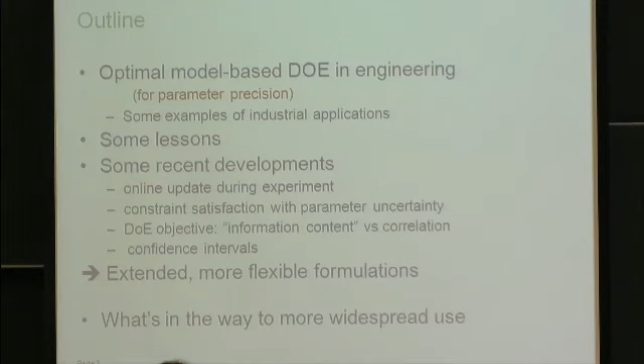I'm personally quite excited about the possibilities I've discovered quite late in terms of extending the range of traditional formulation. And I will stop in the end nonetheless to highlight some of the reasons I believe this technology is not in more widespread use as it should be.

My own background, I'm a chemical engineer. I've been involved for many years in what is called process systems engineering. Is there a pointer?

And what that means is that the whole business, from designing new products and processes and production systems, is now very much centered on the use of mathematical models at all stages. And if you can describe what's going on, then you can analyze, you can optimize all the way from the initial inception down to the supply chain and distribution and impact on the worldwide scale. So that's what we do, provide this mathematical support to these processes.

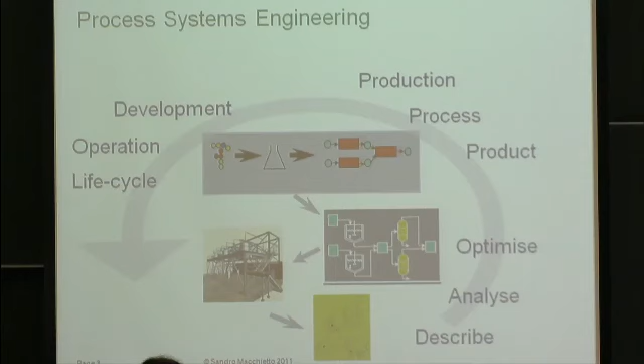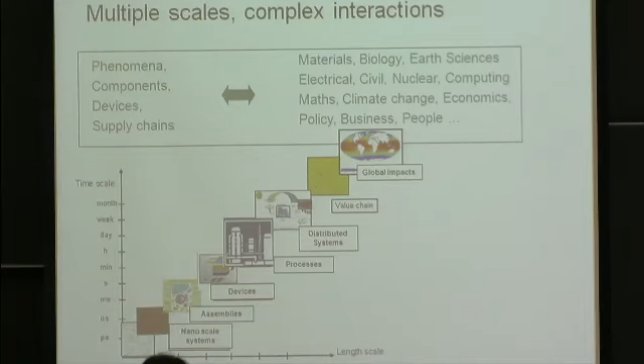And in fact it's a very complex business because it involves dealing with processes at all kinds of scales, from the conversion in the vessels, reaction and heat transfer and so on, all the way up to global impacts on value chains, but also picking up the behavior of materials within catalysts, within small assemblies, all the way up. So it's actually quite complicated, and by nature this process involves dialoguing with all kinds of people who are domain experts in various areas. So as a profession we are gregarious by design, otherwise we wouldn't be able to do our business. But I'm also a firm believer that we need all kinds of inputs in order to address these problems.

And these days this process is helped by a very large number of support tools which are very, very powerful. Nobody would design a refinery without the support of simulation tools. And more recently, I think the emphasis has been on languages which allow the modeling of the physics in a very easy way. So if you can describe the physics, if you can describe the basic equations that regulate that, and if you can write the equations, then you should be able to use the modeling language to do that, and not have to worry anymore about translating that into a C program with all the solutions, technologies, and in fact you can write models now quite easily. Some of you may be familiar with MATLAB, but there are many other engineering-oriented languages which do that.

I've been involved with one in particular called gPROMS, which addresses that in the chemical engineering environment. This typically also involves the use of a library of pre-canned models for traditional unit operations, whether it's separation, distillation, or reaction, and so on, and access to thermodynamics and physical property packages, which are also very important to describe the physics.

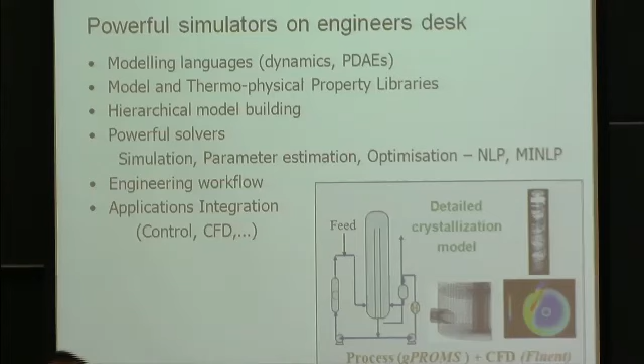Very efficiently. They also address the aspect related to the workflow, in terms of understanding how engineers work in their environment, in order to provide, for example, mundane but really very important things like management of and auditing for the evolution of models and tracking their application.

So that when you want to replicate something, you know exactly what you were using at that point. This is extremely important from an application point of view, although for the mathematicians involved it may not even be of importance. And also other application integration, for example, with control systems, with computational fluid dynamics, and so on.

There's some really interesting applications. We can describe, for example, a whole large-scale crystallization model using detailed population dynamics, in terms of how the crystal cells form, break, and dissipate.

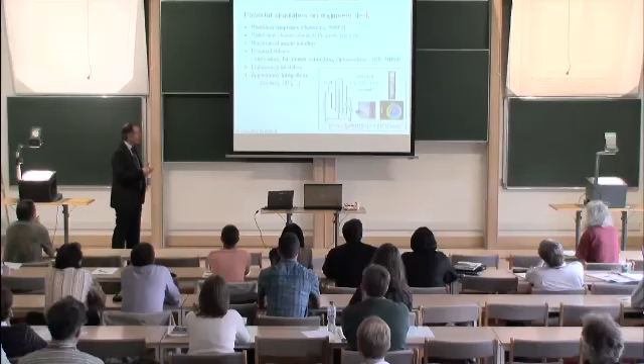You may have 3,000 or 4,000 model equations at a single point to describe this, and you can then couple this with the fluid dynamics to integrate the interaction with shear stress and other important factors. You can do this simultaneously, so you can also use these techniques to detect the effects of geometry, and hence look at scaling up and scaling down.

It's fairly recent activity, but it's very interesting, and this can be done on a fairly regular basis now. So, being everything so model-centric, one of the key questions is: where do these models come from, and how do I know whether they're any good, and how good do they need to be for the job on hand?

These are open-ended questions, but it's clear that's where statistical validation comes in. If you want to do all of these things, you better know that your models are good enough, okay? And enough is the operative word, because otherwise you end up with a Schrodinger's equation for everything, and that's clearly not possible.

In my personal view, the ability to write down the equation and generate the model is no longer the bottleneck. Anybody with a little understanding of the physics can do that. The question is whether those equations are right or wrong. So model validation is now a big bottleneck, and hence all the statistical paraphernalia which are necessary in order to do that.

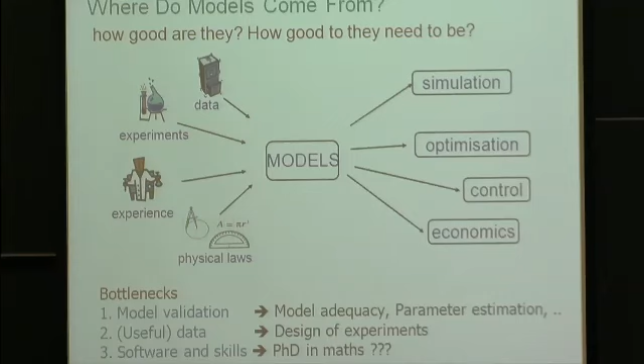So the design of experiments, that's where it comes in. The idea is generating useful data that go side by side with the process of building a model. The two things not being sequential or separate, but being part of the same thing.

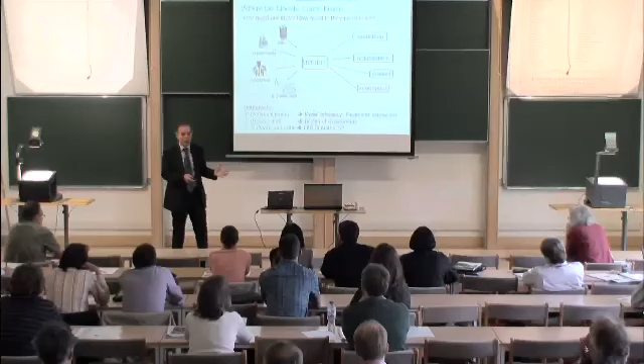And in fact, the bottleneck at this point is not just being able to do that, but being able to do it in an environment which supports your everyday work, rather than having to take time off, hire two PhDs to support you, and then come back two years later with the answer when you're no longer interested. So you do this within a work environment, which puts its own constraints.

I will mention this. Let me give you a couple of examples. These are examples that have been addressed recently -- very, very key within the field of addressing the energy needs.

Lots of work on fuel cells. At the center of the fuel cell process is the process of essentially oxidation that goes on between the fuel and the air in a membrane cell.

You have an anode and a cathode, and you have an electrolyte in between, and the transfer of ions on one end releases some electrons, which you can run around to light up your light bulbs. So that's the basic process.

Once you start looking at the physics, it's actually quite complicated. There are the reactions themselves at the surface of the anode and the cathode, electrochemical reaction and activation overpotential that dictate how they happen. There's the diffusion of fuel and ions in the system, so there's mass transfer. All of this is dictated by temperature and heat release, and it's all interactive. So it's very complicated to understand what's going on.

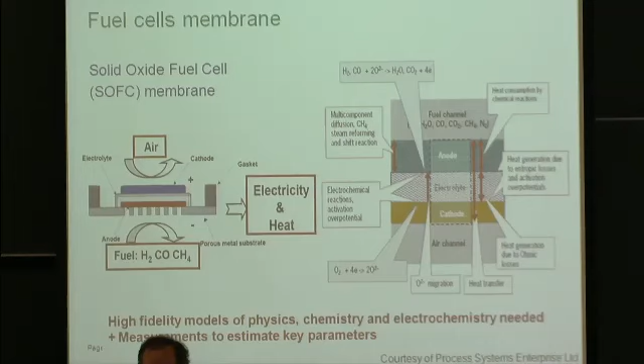On the other hand, if you cannot do that, then you cannot design, and the alternative is trial and error or experimental work, which is quite heavy. If you can get a model to do that, you can say what should be the target for my material design, my assembly, my configuration, and so on. Some things you can do with high fidelity models, but there are also things you cannot predict a priori, ab initio, so you end up having to do key measurements to calibrate your model.

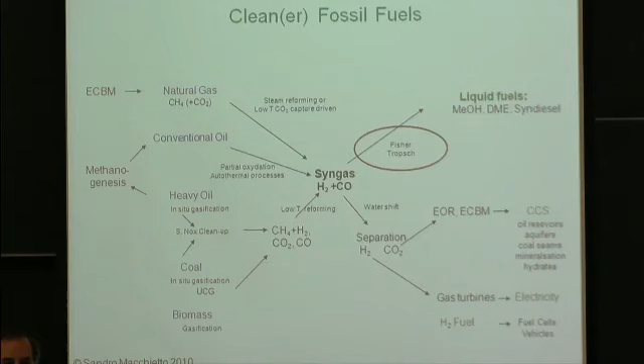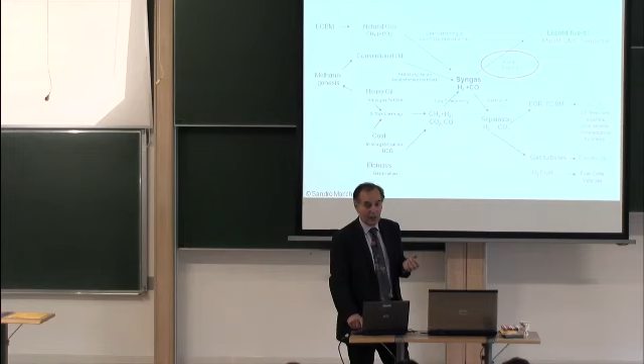Another example, and we'll come back to that, is again in energy applications. Everybody talks about the syngas economy. You can generate hydrogen from a variety of conventional and unconventional primary sources, including biomass through gasification and so on. Once you've broken down the molecules to their essential CO and H2, you can rebuild them in a variety of ways, including to make synthetic fuels. Fischer-Tropsch is one of the classic methods for doing that — very old, the Germans used to do this from coal before World War II, so it's not a new tradition.

One of the key issues is the catalyst that makes this happen from natural gas or methane and oxygen, producing the molecules you want and assembling them in the right configuration. But it also assembles molecules in other configurations, so you get product distributions that are very spread out. You get a lot of unwanted stuff along with what you want, which means the yield of your product is low and you have huge separation problems.

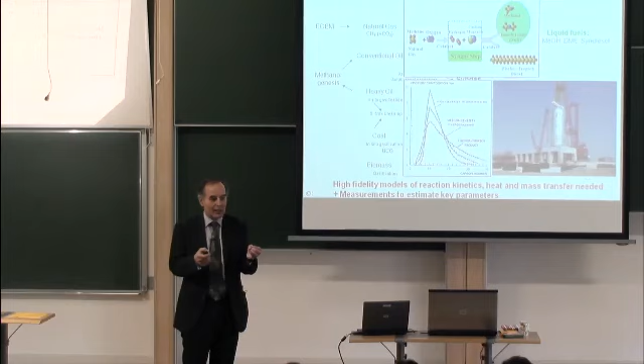The economics is really dictated by what happens at these catalyst sites, and these are very big reactors. So you can write models for the mass and energy transfer, but at some point you need to identify key parameters characterizing both the reaction and the heat transfer and how they work. The problem is not easy. I'll come back to this and show how design of experiments has been used in this area.

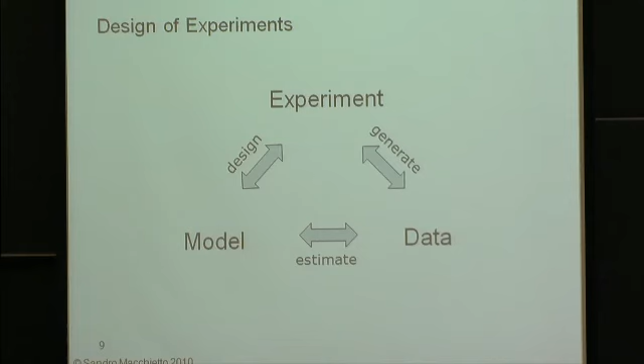Since you are here, you all know what this is about. The idea is to generate this virtuous circle between using your understanding from a model built from initial data — using the structure of that model, the rich information within it — to decide how to plan your next experiment so that it generates data which are useful rather than not. That's the basic idea, and there are lots of variations on this, and we'll see how some of these are applied.

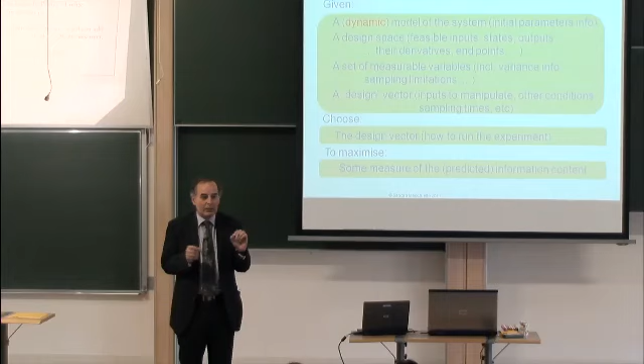In a standard situation, you'll want a model — I've used partial differential and algebraic equations, PDAEs, which can be discretized into a differential algebraic equation model as the general set. It's dynamic in general, because if you perturb something and elicit responses in a dynamic sense, you get a lot more information. That's one reason for having dynamic models, but also because the processes you want to describe are intrinsically dynamic — reactors aren't at a particular steady state, you want to start and stop them, so you need models that describe those situations.

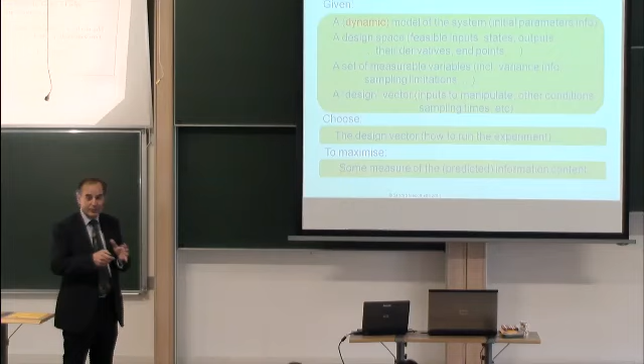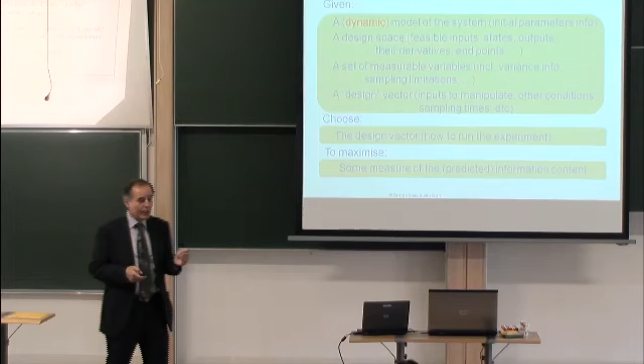You have a design space within which you can decide how to move, which may include both the temperature and pressure within which you can run your experiment, but also the derivatives — how fast something can react, or how frequently you can measure certain quantities, and where you want to end up in your experiment.

You don't want to end up with a very high temperature, because you need to be able to shut down and leave things at a steady state.

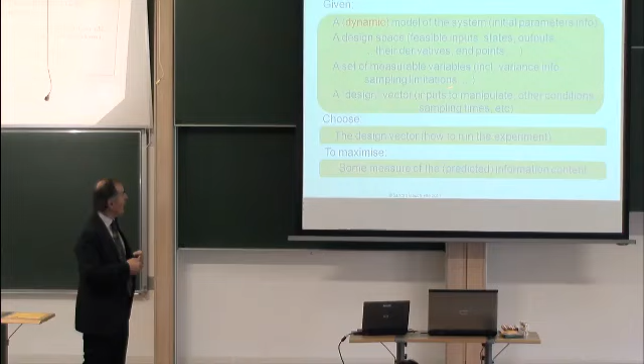You need to identify what are the variables you can use, measure, and the quality of those variables. You may have some choices there, variance information about the data you can get, and sampling limitations, which I already mentioned. Within this, you also need to design what you can manipulate, which is within your domain as a designer to change.

Out of this, you need to have something that helps you decide what is the best experiment. And best means something related to what you want to get out of this information. So the qualification of best is actually quite important.

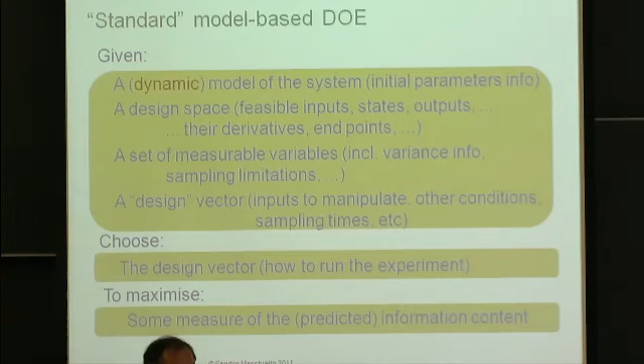Typically, the objective function being used is some measure of the predicted content or value of the experiment. If you're trying to estimate your parameters within certain precision, then it's related to the variance covariance or the ellipsoid of the confidence intervals. But that's quite key, because if you're trying to optimize something, you need a scalar.

In putting together this talk, I went back to some of the early stuff. It was one of my very first PhD students, many moons ago, who helped me formulate this as a dynamic problem, an optimal control formulation. Apparently, it hadn't been done before with DAE systems.

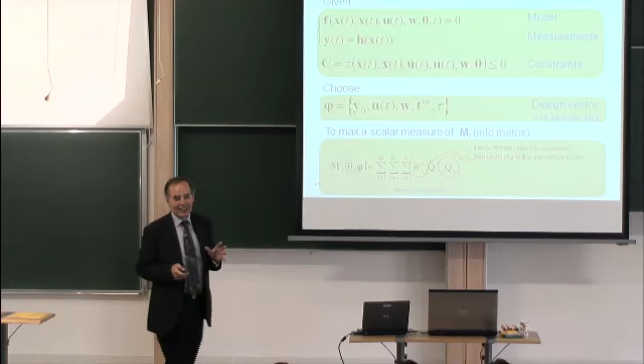This is more or less the formulation we had at that time, 89, mid-80s. Great problems at that time. The formulation was done, conceptually the problem was solved, but nothing worked. We had incredible difficulty getting the equations to solve, and the optimization techniques weren't up there. The integration techniques got stuck and took forever, and we had to scale back and back and back until we could solve anything of any use.

But conceptually we were there, and the formulation included a sample time for when to do your samples over time. So there is clearly a time dimension here, but within this there could also be a space dimension. In particular, if you had discretization of a partial differential equation using any discretization technique, you end up with a large set of differential algebraic equations.

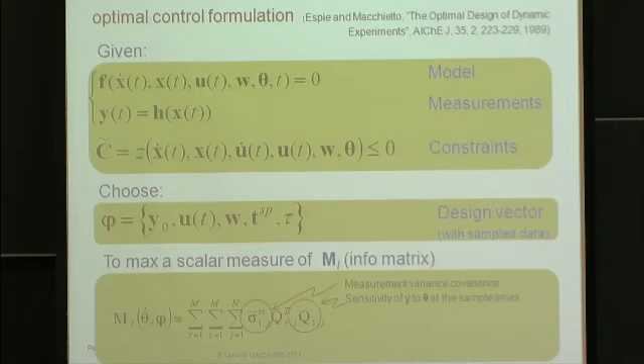The other interesting thing was that for a sampled system in particular, this scalar matrix we looked at, we use this information matrix, which is just the inverse of the variance covariance matrix. You can call it the Fisher matrix. Many names have been given to it over time.

Essentially, it has two components. One takes care of the dynamic sensitivity of the responses, the things you can measure, to the parameters, the things you want to identify, at the sampling times. The other takes care of the quality of the measurements.

You can add them up in a variety of ways to try to transform this into a single scalar. I think the scalar is a very powerful number because it has to tell you a lot of things about all the parameters and so on.

It's usually related to the 95% confidence ellipsoid of the predicted experiment. The usual way is that a small ellipsoid means high confidence, meaning we know that the predicted experiment will give you very good data. This can also be translated to a single number by looking at the trace, or the volume, or the largest eigenvalue along this.

It's quite classical, and a lot of people have lots of variation in how to do that. But the basic underlying thing is that small ellipsoids are good.

You can then formulate this by sticking this scalar into an optimization algorithm and try to minimize this ellipsoid, taking into account some prior information from experiments you've done before and initial values of the parameters and so on.

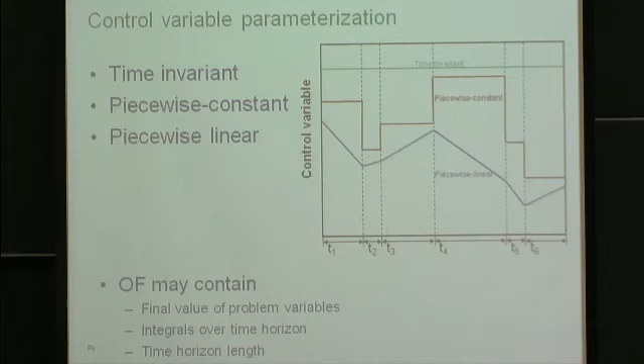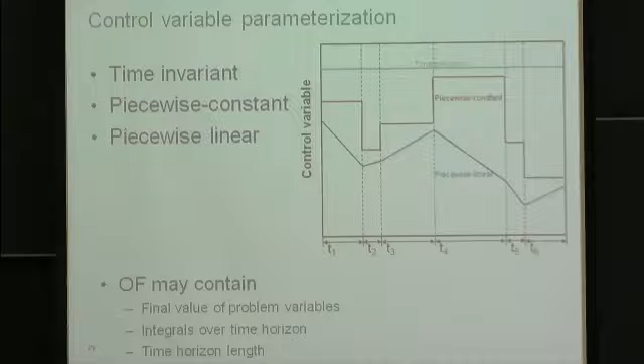You transform an infinite size program into a small number of optimization variables, and it's proven to be very useful. Typically then you can have a nested program doing the integration of your equations and manipulate the control variables on the outside in order to optimize your objective function using possibly successive quadratic programming.

Has been very successful in this area with a highly nonlinear function. The trick here is to reduce even a very large number of states into a small number of decision variables, and for this type of problem this seems to be working very well.

The objective function may contain all kinds of varieties of information which are of interest to the engineers. The final values and variables, whatever your experiments, you need to leave it at a decent temperature or within a safe range.

Concentrations and so on, and you can have integrals very easily - the total amount of energy you spent or the total amount of molecules you use during an experiment, because you can convert this into the equivalent differential form, and the experiment length itself can be a variable.

There is also quite a nice way of handling constraints. Constraints within this environment are quite important. There's a difference between this approach and a purely statistical black box approach, which has great difficulty in handling constraints. You have a model, so you can predict where your states will go.

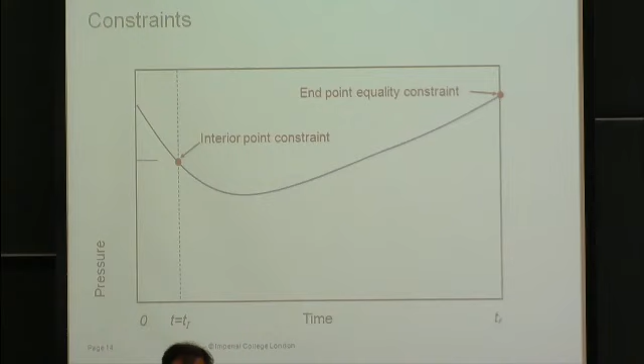And you can use that to say, well, are my constraints going to be violated or not? You can have different types of constraints - at the end, as I already mentioned, or at given times within the interval, or in fact at all times. Whatever you do, don't have your temperature exceed a certain maximum value, or never use more than 20% of your composition of X, because you go into the explosive range, or a number of other interesting things.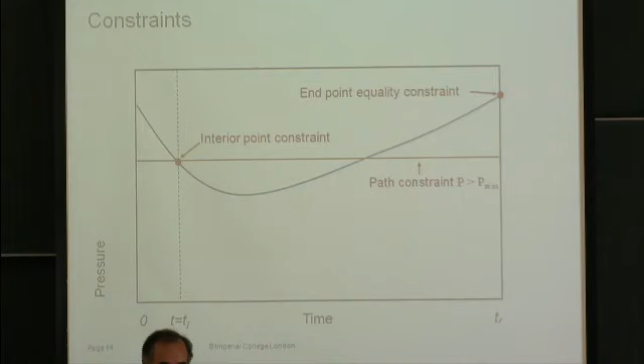These interior path constraints are not easy to handle on their own, but the kind of classical way is to calculate the integral of the violation and then put the integral of the violation as one of the constraints.

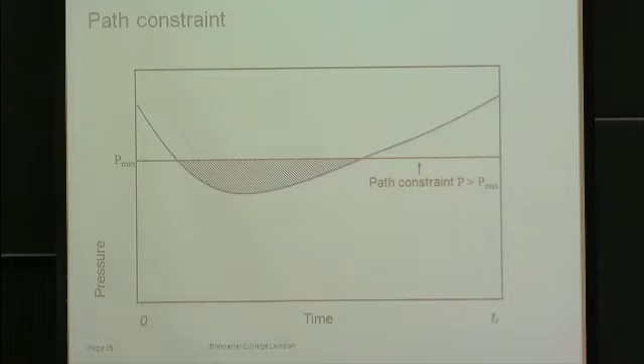All of this has actually been packaged and is available in - not in many, but in some standard simulators. So what I talk about here is a degree of practical maturity. What does that mean, a degree of practical maturity? It means that somebody out there is starting to use it.

Okay, let's not get carried away - this is not a technique that's now commonplace, but some engineers are starting to make use of it. And one of the reasons for that, I think, comes from the modeling side. It's become a lot easier to formulate the problems.

So you don't have to spend all your time writing your differential equations and then translate it into programs to interface with various optimization libraries or simulation libraries and so on. That drudgery is by and large taken away from you, so people can concentrate on the use of the problem rather than problem formulation. And once you do that, then you can resort to the same powerful integration and optimization algorithms which have been done for simulation and optimization - that's a great advantage.

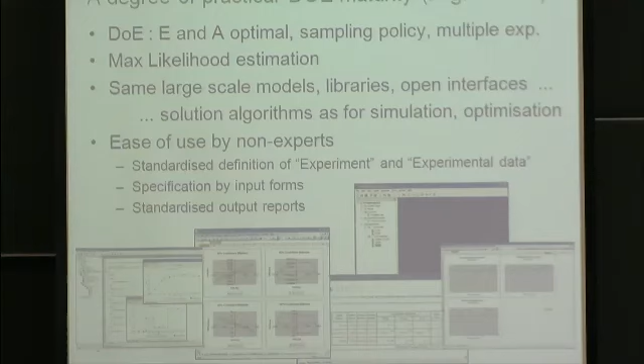And the same in terms of the output reports. Engineers don't like statistics, okay? It's an acquired taste. In many cases, if you make life simple in terms of interpretation, then they may actually understand what it is, but otherwise they will not want to go anywhere near it.

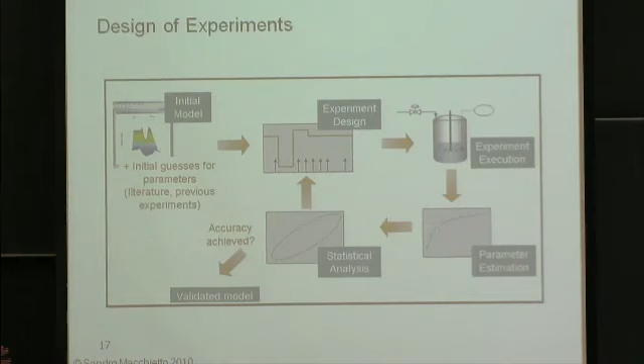That's a given. So even having standardized output reports with interpretation that help translate this fairly simple, sometimes statistical analysis into something usable is actually quite helpful. Let me go back - so now we can actually close this loop within an engineering environment, and let me give you a couple of applications of this, coming back to the ones which I've illustrated.

In terms of generating the models here, this can be done now using a fuel cell library where you have primitives for the electrolytes, primitives for the anodes and cathodes, and you can do that by selecting model and specifying the models rather than starting from scratch. You can also resort to the thermodynamics for a lot of the thermodynamic for electrochemistry and heat phenomena. What is not possible there is usually to identify some of the key parameters.

I'll give you an example. This is a fairly standard so-called flow-through experiment we use in the industry to characterize the behavior of a single membrane. And this has a number of features. You feed air on one side and the fuel on the other side. There's electrolyte and the anode and cathode. You measure the different voltage. You measure the amperes, given from a certain resistance.

At certain conditions, with a high feed-to-air flow rate, you have a good amount of reaction going on. The conditions are fairly uniform, but it becomes quite difficult to measure the changes in composition. On the other hand, you could use a low feed-to-air ratio, and it becomes a lot easier to measure precisely the changes in composition. But then you have maldistribution. It's very difficult to ensure that what happens at one end and at the other end of the membrane is the same. So there are intrinsically difficult problems, which means you have a formidable problem in data interpretation, even if you have lots of data.

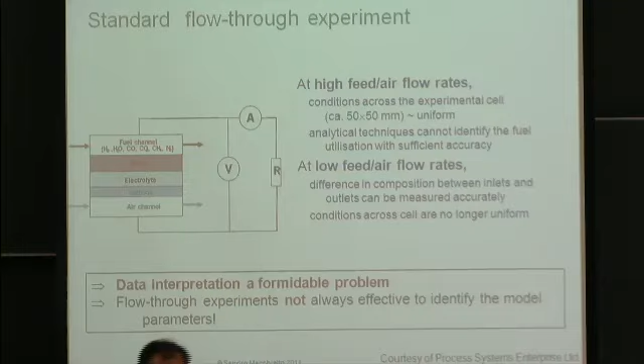What happened here is, using the model of this system, we looked at what is the best alternative experiment that could be run, designing the apparatus itself, and it turned out that rather than a flow through, a recirculated flow here will actually be far better, because the changes in composition will be larger, and you can measure them accurately, even with a high fuel-to-air ratio. And because most of the oxygen here will be depleted, you have little reaction even at the high fuel ratio. So this type of apparatus was designed using a fairly high fidelity model of the reactor itself, and it gives a lot of very, very good data, especially when coupled with the data collected from the other experiments.

So the two work hand in hand, and you are able in this way to characterize some of the reaction kinetics. The interesting thing, once you do this for a single cell, is the lowest level component within a fuel cell. A fuel cell will have an additional number of stacks, one on top of the other, to increase the amount of electricity produced. The air flows in between, and the fuel in between in a sandwich form, and they go across, so it becomes more complicated. But in fact, this can also be modeled.

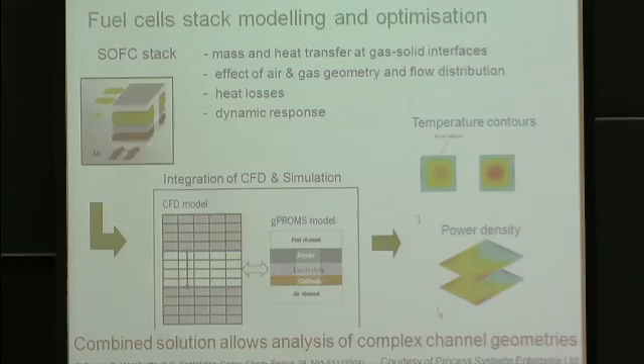The flow dynamics can be modeled. You have lots of diffusion in two directions. For this situation, this can be the basic model for the electrochemistry we just described, coupled with a CFD model to describe essentially the flow dynamics and flow diffusion there. And it turns out that you can do some experiments without the reaction, just to identify how the flow goes. So you eliminate a big problem by looking at essentially two problems separately: the reaction itself and the flow itself, and then you put them together, and you find that you are able to predict two very important quantities.

That is the power density, which is how much electricity is really generated, and its distribution, and the temperature contours, which reflect that. You would like both of them to be very uniform, ideally. And then you can go back and decide about what is the optimal flow distribution and stack arrangement, and ways of controlling that. So that you can do for the stack. There was no design of experiments here for the ensemble, but for the individual components.

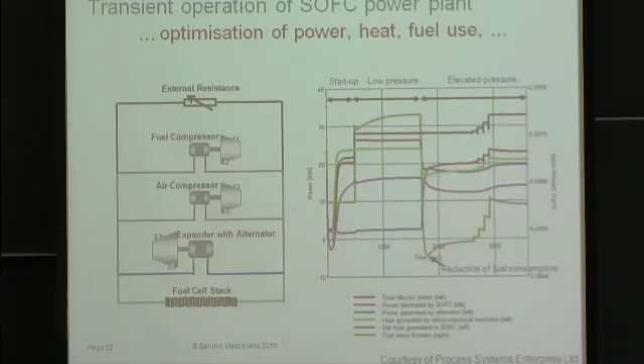And in fact, quite a lot of the fuel cell providers, Toyota and others, are using now this modeling technology together with the experiment design within that to design their own version of mobile fuel cells or for static applications as well.

Let me come back to the other example, which I already mentioned, this Fischer-Tropsch reaction.

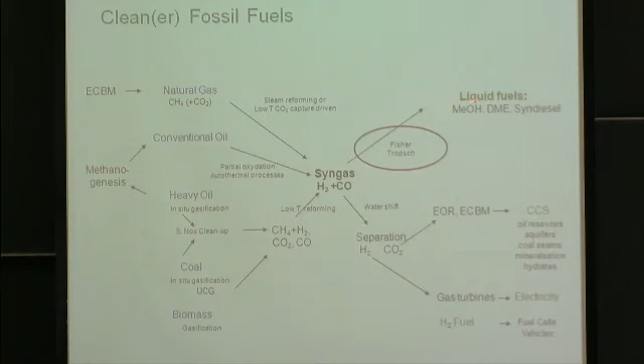Here we are concerned about remembering the whole scheme of things, going from either natural gas or biomass and so on to the smallest molecules, the syngas molecules, and then from there to liquid fuels, syndiesel, methanol, DME and so on.

I already mentioned that the product distribution is really the key to achieve this. Why is that a problem? Because if you wanted to do that in a very small device with no time and space distribution, you may be able to control it rather better.

But if you're trying to do this in one of these humongous beasts, 22 meters, 1,200 tons, this is a shell and tube reactor. There's lots of tubes with catalyst inside, and because it generates a lot of heat, there's heat removal on the outside. Controlling the temperature within this reactor is actually quite tricky. All tubes experience different environments, so each tube has a different profile, and you end up with quite a large controllable problem.

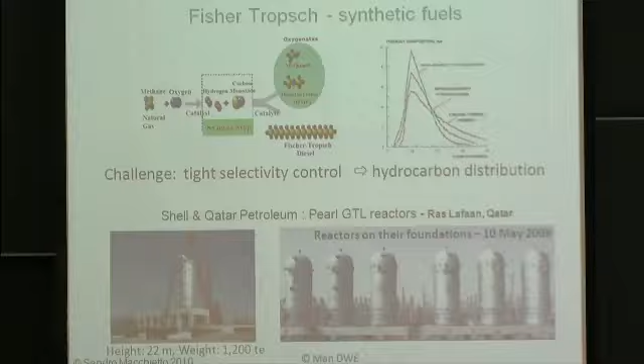Just to give you an idea, this is the Pearl development that Shell and Qatar are building in Qatar. The latest budget was $18 billion, several billion dollars over budget, still lots of uncertainty in terms of how to do that. The reason they are this way is because Shell essentially scaled up a prior reactor they had in Malaysia, just because that worked, and they didn't really want to make many changes just in case.

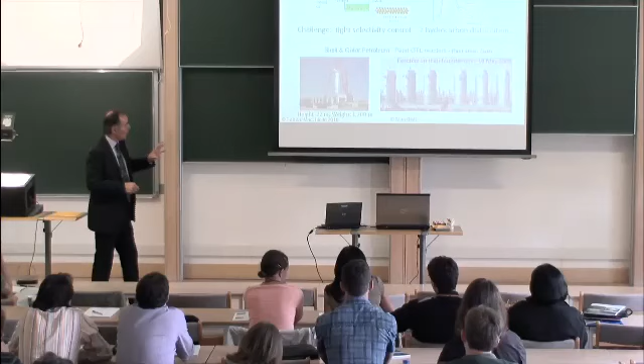You can think about the investment here. So one of the questions is how can we understand this a lot better?

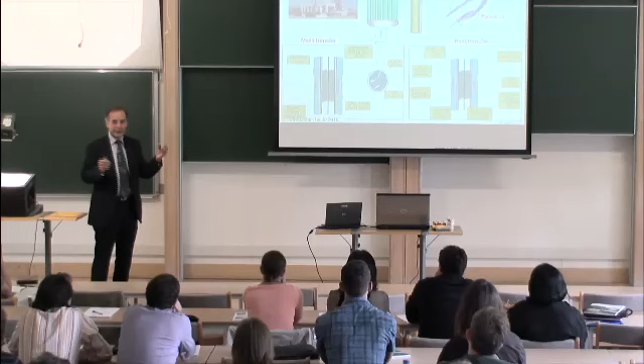The trick would then be to have all the tubes being the same with a fair degree of constancy there. How can you do that? Well, first you need to understand the mass transfer, which dictates how the reactants go inside the pores and come out. Then you need to understand the interaction between the cooling and the reactions going on, so all the heat transfer problems associated with that.

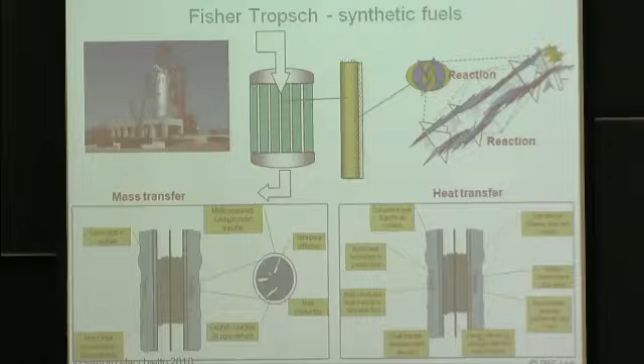The approach taken here was to really, rather than try to identify something as complicated as that, which it is, and you may have 30 or 40 reactions going on, to try to say, well, can we divide and conquer? Let's have a place where reactions go on their own, so a microreactor where you don't have heat transfer, and another place which is a typical tube, and you just measure the heat transfer properties in the absence of reaction.

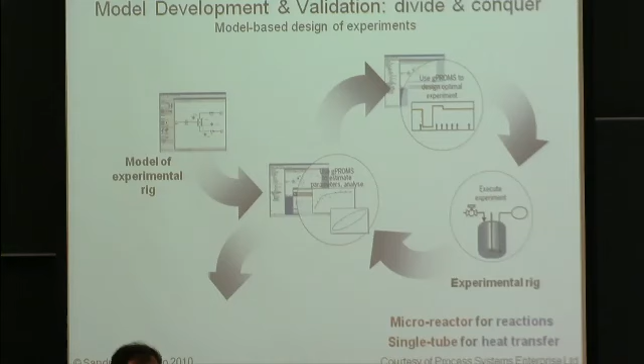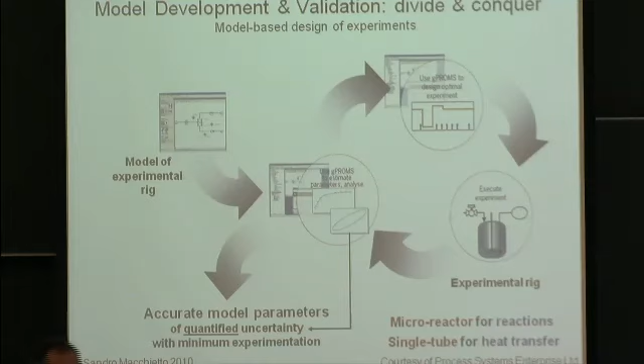You can devise, and in fact, rigs were built up in the same way using this model-based design of the equipment and experiments, and then you can do a certain number of experiments identifying independently the reaction and heat transfer components until you have some models of these Lego blocks. Then you put them together within the engineering configuration, taking into account flows and how these interact, and again, lo and behold, you can find something which is much more predictive because you got the physics essentially right.

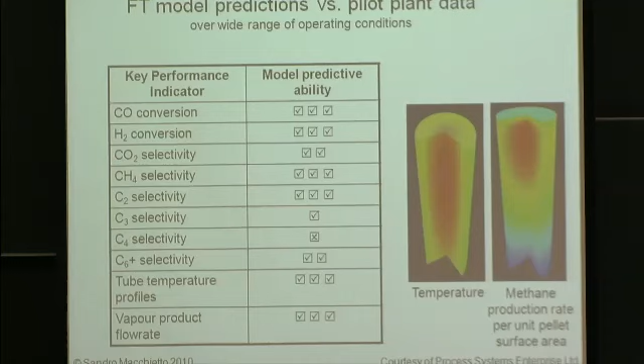Here are some slides showing that the important quantities you really want to get right are mostly obtained quite well. In particular the methane and CO conversion are obtained quite well, and these are temperature and composition maps along just one pipe, showing that they are nowhere near being uniform, but they're a lot more uniform than they would otherwise be.

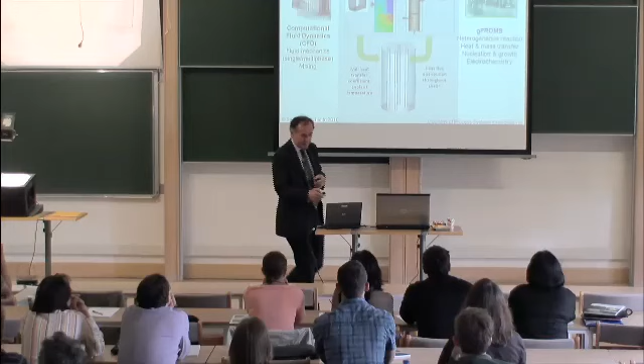So once you have confidence in the model prediction, then you can do design and optimization studies. And in fact, this can be done by putting together this simulation model with the fluid dynamics that tells how the cooling fluid will be circulating on the outside.

You cannot do this for the 10,000 tubes that are in a reactor, but it takes samples from some tube at the center, one near the edge, and so on. You can look at various design ideas for getting the tubes all the same, including loading each tube with different catalyst activity at different positions, and manipulating the geometry so you can affect the heat transfer properties to get the same composition.

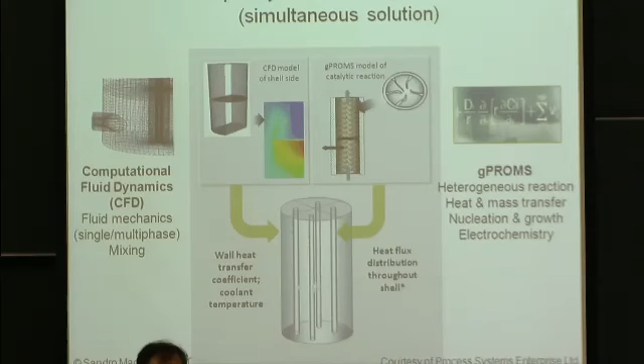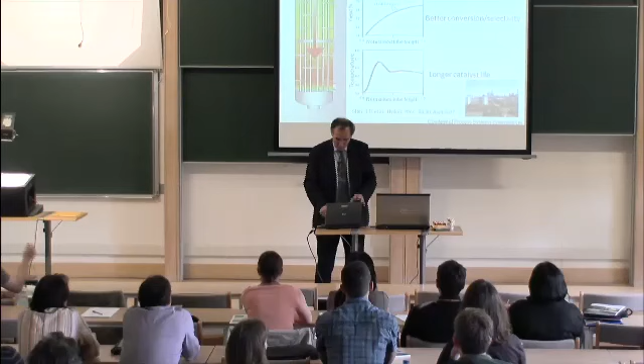The temperature profiles here, again, are all the same for the various tubes, which means you can much more easily predict the yield and optimize it, and also adjust the catalyst life and make life much easier. In fact, this is a plant that's being built in Korea as we speak. So this technology is really built on accurate values for your high fidelity models, which were obtained using the design of experiments.

In spite of the success of these techniques, there are some common findings. Even if you're able to do sophisticated stuff with complex models, typically you get, in a lot of situations, confidence ellipsoids which are very highly stretched, no matter how you try. Some may be good, but they may include lots of negative things, which physically doesn't make any sense.

So correlation is actually built in, and then people start to ask, is it the model? Is it the analysis? What do I improve? Is it the data? Actually, this is very good progress, because by the time people start asking these questions, it means they understand statistics, whether they know it or not. Do I have the right apparatus to get the data, so that my design space is not big enough, or so on?

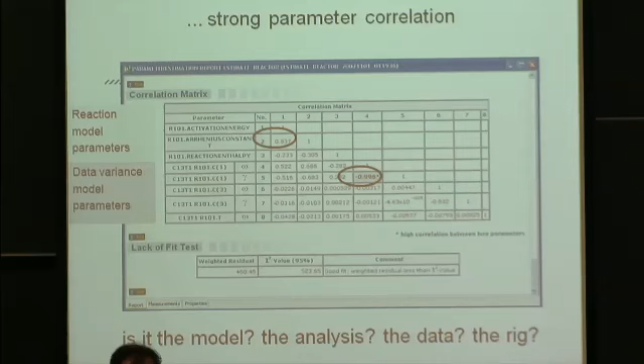But that's the way of life, lots of cases you cannot get away with that. I think there is a very elementary explanation for that. Many of these phenomena are fairly complex, and very often, just looking at the sensitivity profile, some parameters show good sensitivity in one state and then go to zero or very low, while other parameters have high sensitivity later on. This is common. In physical terms, this means there is a change of mechanism along the way, and some mechanisms are more dominant in one area, and other mechanisms are more dominant in another area.

And if you try to have an experiment where you try to do both, some of the data will have singular parts in it, no matter where you are, and that makes it very difficult to estimate those parameters.

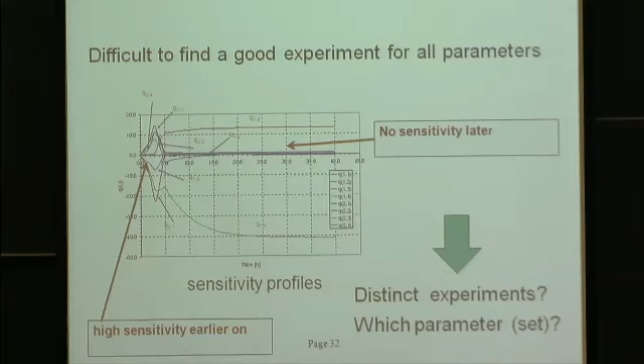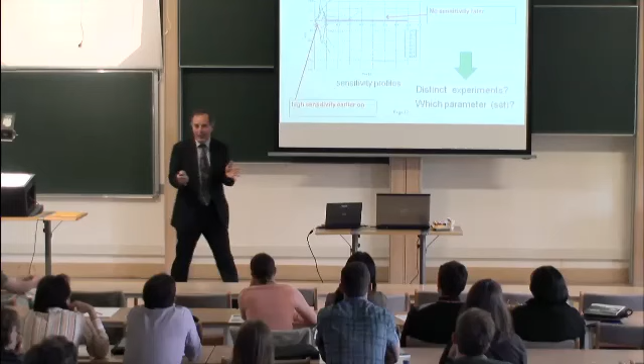In fact, the way that turned out, based on intuition, those earlier cases was to decouple: let's do some experiments for the kinetics, some experiments for the heat transfer, let's not try to be too ambitious. But very often you have 10, 15, 20 parameters, and you don't know how to decouple. And if you start looking at it as a purely mathematical problem, you find that trying to do everything together, you may not be able to do much more than so much.

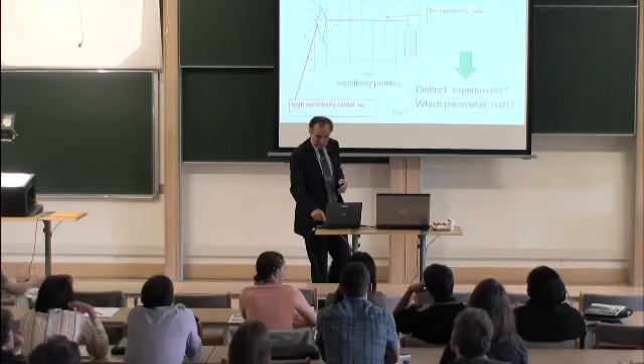So the question is, can I do this in a more automatic way? Can I identify the disjoint parameter sets and do different types of experiments? Here are some of the ideas we've been playing with. If you start to think in those terms, well, why should I do one experiment at a time? Why can't I do parallel experiments?

Rather than design one experiment, design two. Then you have the flexibility to design two experiments which are the same, giving you more repeatability essentially, or design two experiments which are orthogonal to each other, and you get two sets of values. I'm not going to talk very much about parallel experiments here for now, but there are some interesting ideas there. The other question is, how do I account for the error to start with?

You wouldn't need to do this in the first place unless you had error. So every model has error, especially at the beginning when you start with maybe some ideas of what the model might be. But what happens there? I'd like to touch a little bit on whether we're actually solving for the right thing.

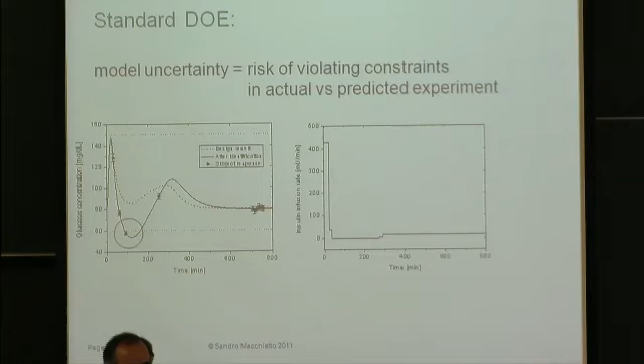Do I have the right objectives here? Let me give you a few hints. I'll go quickly, talking about uncertainty. The classic case is that I may have some bounds, and I design experiments, and my estimate of the optimal experiment would be like that. When I actually do it, due to the model mismatch, I may violate some of the bounds. So how do I deal with this? If this violation is not big, or not terribly life-threatening...

In some cases it is life-threatening. Here's a situation from some collaboration with my colleague at Padua, Fabrizio Bezzo, and Galvanin, who I think have a poster here on this, looking at a physiological model for diabetes. This is reasonably well understood, how the glucose cycle works. There are some compartmental models for that, but this is a very non-linear response over time.

So one of the ideas was, how do we deal with this? There are a number of standard tests to identify individual responses — these are what medics use to say, do you have diabetes, and how do you respond? The question is, can you use design of experiments to do better than that? I'll just give you some hints on this.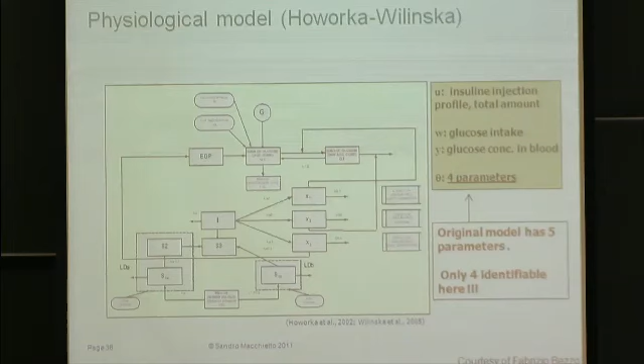There are a number of models around. You can take some of the state-of-the-art ones, and quite quickly find that some of them may have identifiability problems. They may have lots of parameters, but there's no way you can identify all of them. So even before you start, statistics is useful for this purpose.

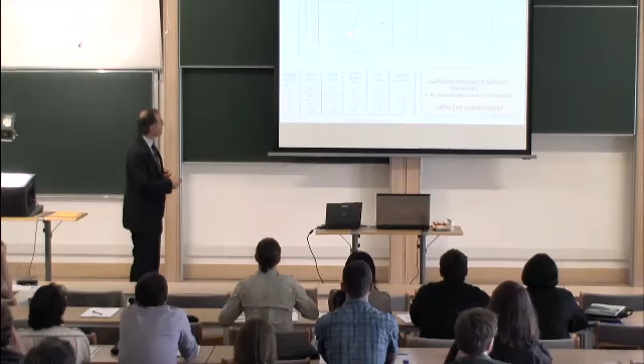And then if you ask what would be the optimal placement of samples for one of the standard tests, you can find it would be, over a time of several hours here. You want to put in some excitation, but not too much, just in case.

You can say, well, in this particular case, all the parameters will be estimated, but what is the effect of uncertainty? By definition, an optimum design will go to the extreme, very often to the extreme of your design space, because that's how you get more information. So it's built in that you will end up against the constraints.

One approach to look at the effect of uncertainty on the model or parameters on the constraints was to establish the variance of the responses. What is the probability that your responses are just the nominal one, and what's the cone of your responses? And if you want to meet these constraints with 95% probability, or 90% probability, how far back should you be? That's the basic idea.

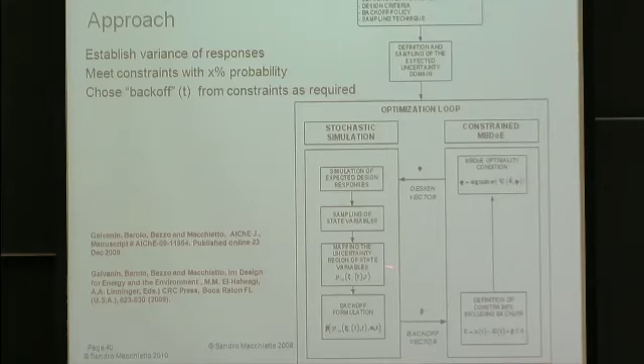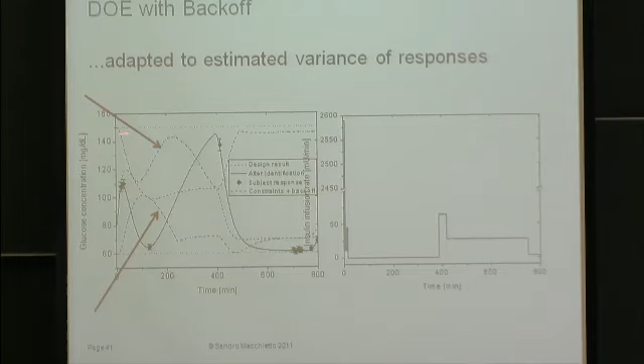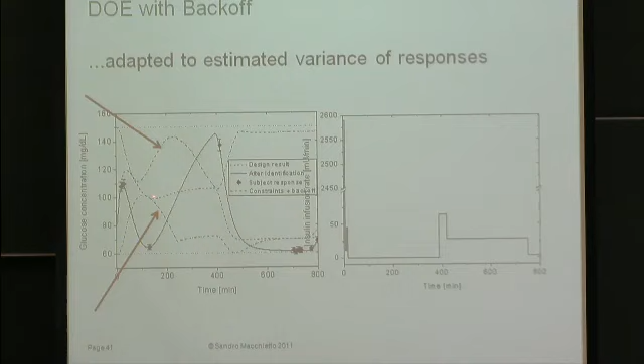It's actually not easy, because just establishing the variance of response for a general highly nonlinear system is tricky. But you can do that, and it turns out that rather than your nominal constraints, you have something which adapts to the uncertainty that you have. So your new constraint is like that, and the nominal response will be within those two constraints. That's one way of dealing with it.

There are lots of other ways, and I think that's an area which will need some attention. And you can find then the 95% probability of response.

The other thing I'd like to mention before going on is: are we solving the right problem, and what is really the objective? I must say it was a bit embarrassing when I went back to some of these things, because we all know the objective for parameter measurement is to minimize the 95% ellipsoidal confidence region. And in fact, it is true, when you have in the limit very small intervals.

Now these also have no correlation — they tend to be like that, but that's only true in the limit. In most practical cases, it's actually not true. So you can have a small volume there and a very elongated confidence interval, and there is no direct link with the correlation. So in general, this is actually not true.

You might expect it, so if you say, well, how do I get something I also want from my experiment — something that produces parameters which are not correlated, in addition to being well determined?

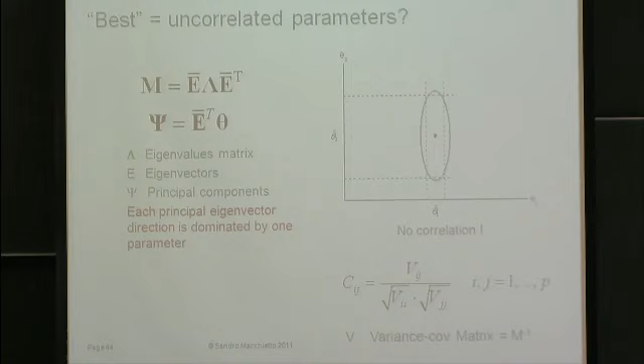Once you do that and identify that each principal eigenvector is dominated by one parameter in this situation, you can reformulate the problem in such a way that you get what you ideally would like. For example, you can minimize or measure the correlation rather than minimize or measure the information content by the ellipsoid, or you can minimize that subject to some bound on the information content you're going to get.

And you may have an initial estimate using a standard design of experiment with an E criterion. I'll give you what the basic eigenvalues will be in those situations, and you can then formulate a problem like this.

Or vice versa, you can say, I can set up a problem which I maximize my information content, but with some bounds on the correlation that I get. You have to be a little bit careful here, not to put too strict bounds, because otherwise the problem may become infeasible. But you can also get some idea what these bounds might be, because if you solve the unconstrained problem, that gives you the highest value, and then you can tighten this progressively.

And this correlation may be between two parameters which you specify, or maybe some kind of norm of all the values. Or you can minimize the correlation subject to a bound on the variance, and there's a lot of varieties of ways of reformulating the problem here, which I think eliminates by design the inherent problem that you end up with an elongated

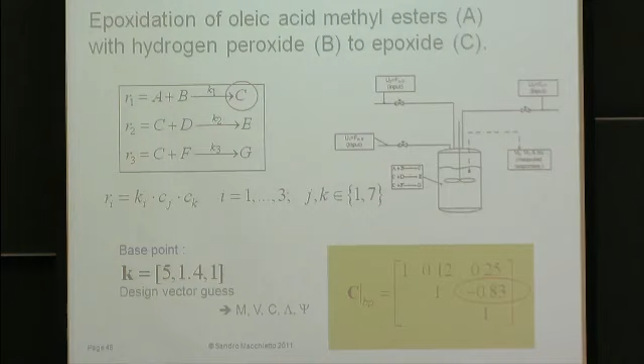And here is a classic reaction example. This is a product you want, but then of course your product enters other secondary reactions as well, so it's very difficult to isolate this stuff. And as a consequence, you have a fairly high correlation between the parameters here.

I'm not sure whether you can read this, but this is the base point, and this is the optimal point. At the optimal point, this ellipsoid is perfectly aligned along the axis. So in order to do that, you need to give up something about your information content.

That is how much, and what is the trade-off. It turns out that in a number of iterations, you are able to get both very nicely behaved ellipsoidal confidence regions and also very good decoupling between the two.

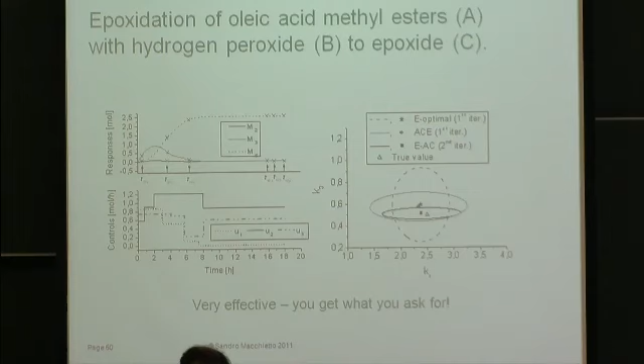Okay, so it's actually quite effective. We found it in a number of situations. This works very, very well. The real value of this, the advantage, is that you can actually start to pose yourself different questions.

That if I want to identify one parameter rather than the whole set of parameters, what experiment could I do, and how can I disentangle what happens with that parameter from what happens with everything else, or a subset of parameters. You can really use this machinery to start to understand, can I decouple various aspects?

There's still a combinatorial aspect, because if you knew a priori which parameters are decoupled, you would go for them immediately. But I think this allows you to be a bit more creative in deciding which parameters you want to do. Final word of warning.

The approach being discussed here is essentially a linearised method. You estimate how good your next experiment is going to be based on your estimate of ellipsoidal confidence, and many of us are believers that these are very good. But the question is, are they really? Here is a simple case where these ellipsoids are very good in the limit, but if you are not close to the optimum, or consider a very large interval, you find the ellipsoids are not quite so good. These are the true ellipsoids for a given confidence interval, as opposed to the estimated ones, usually based on some truncation, and it turns out these are not very good even for small changes of the parameters.

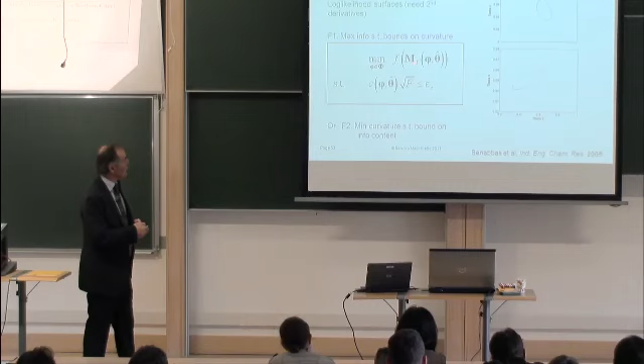So what do you do? You have two choices: ask for more information, or ask for more reliable information. If you want more reliable information, you can put some bounds on some measure of the curvature. To do that, you need the second derivatives, which are heavier, but you can estimate them, and then formulate an objective function with some bound on the curvature. In the unconstrained case, you don't have that, and you get what you had before. So this is an inferior point from this view, but better from that view—a bit more reliable, although the objective function may be lower. It turns out you can do that.

We've shown some initial work in this area. I think this could be automated. It's a lot heavier numerically, but it's just a warning.

I will very quickly close. There are a number of other developments I think are quite interesting: the idea of using a measure of uncertainty with continuous measurement, which my colleague Fabrizio will cover tomorrow in his presentation, so I won't. I also didn't cover going to parallel experiments. There are also interesting ideas of combining model discrimination and parameter estimation, which I'm not going to touch on.

Conclusions. I haven't even talked about the maths or the solution techniques—I've said they're good enough. There's room for a lot of improvement, but we are starting now to see serious use of these, not just from aficionados like myself or a few colleagues in the audience who are true believers, but the unbelievers, those really skeptical about it, using it in earnest in very good industrial applications.

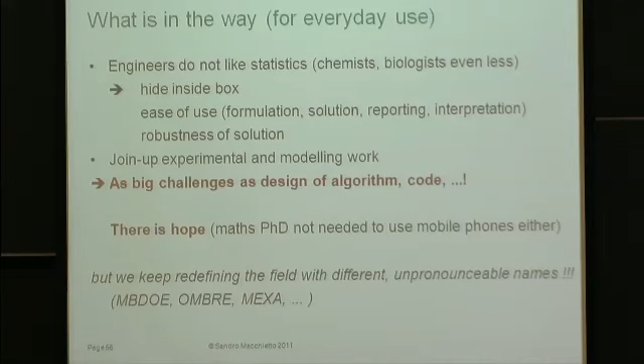The other thing which I think is we are our own worst enemies. Every time we have a little variation of a method, we give it a different name, creating total confusion outside of this community, sometimes even inside, in terms of who is doing what and for what purpose. So I think a little bit of attention to branding. Other communities have done it far more successfully than we are, and I think we maybe can pay a little bit of attention there. Thank you very much.